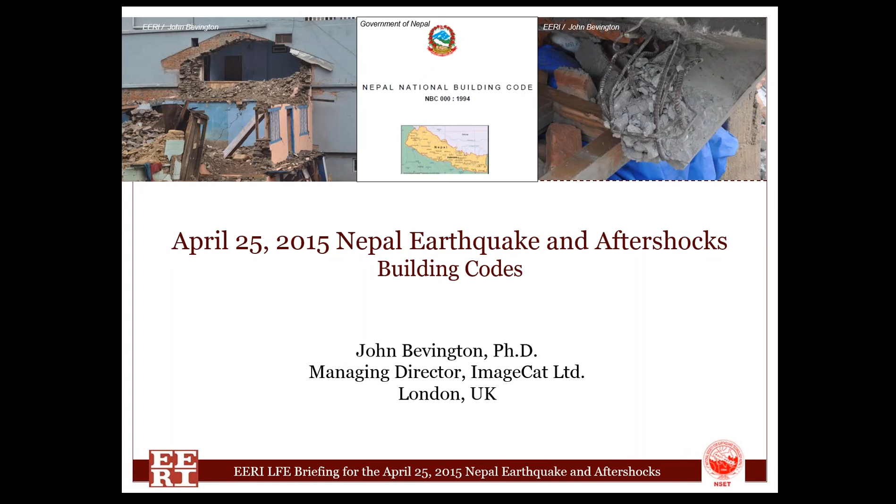Hi, I'm John Bevington, a geospatial technologist from ImageCat in the UK, and I have the pleasure of presenting an overview and discussion of building codes in Nepal. This has resulted from my participation in the EERI Learning from Earthquakes reconnaissance mission to Nepal to study the 25th of April earthquake and subsequent aftershocks.

This talk is one of a series of presentations from the Learning from Earthquakes reconnaissance team, and I recommend that you watch the other talks which cover a broad range of perspectives on the Nepal earthquake. A number of these talks are very relevant to the topic of building codes, such as building performance and resilience, and these are highlighted here in purple.

Building codes are a key issue for any seismically active area, whether a developed or developing country. They provide a set of regulations that govern the design, construction, or maintenance of structures to ensure earthquake safety for the occupants of those buildings. As the saying goes, earthquakes don't kill people, poor buildings do.

Following a relatively low amount of attention in the Hyogo framework for action, especially in the area of code adoption and compliance, the recently published Sendai framework specifically addresses building codes as a method of investing in national and local risk reduction measures. This is not only the development of codes, but also the revision of existing codes and regulatory and practical methods to encourage and enforce the implementation of codes in a culturally sensitive manner.

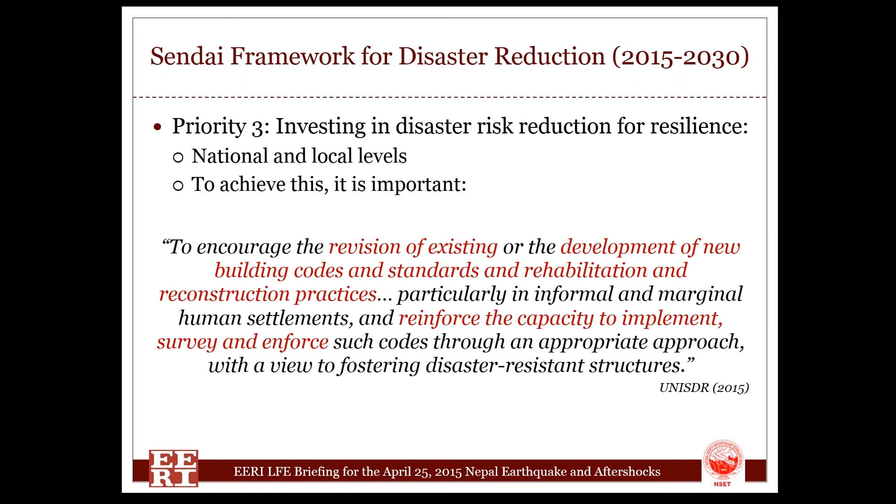An appropriate and effective building code backed up by sufficiently robust implementation is critical for such a seismically active country as Nepal. A major problem for Nepal is the number of owner-built properties. Numerous studies, including the one shown here from 2000, highlight the prevalence of owner-built as the predominant type of construction, over 80% in urban and over 90% in rural areas.

According to the Ministry of Physical Planning and Works of Nepal, only 5% of owner-built buildings have professional engineering design and supervision. Most of these structures follow the advice of local craftsmen and masons. The statistics presented here are for Kathmandu Valley, the most developed region in Nepal. This situation would only be exacerbated for more rural areas outside of the valley. Such a high proportion of owner-built properties means that great importance is placed on finding a suitable mechanism for governance, regulation, standards and enforcement.

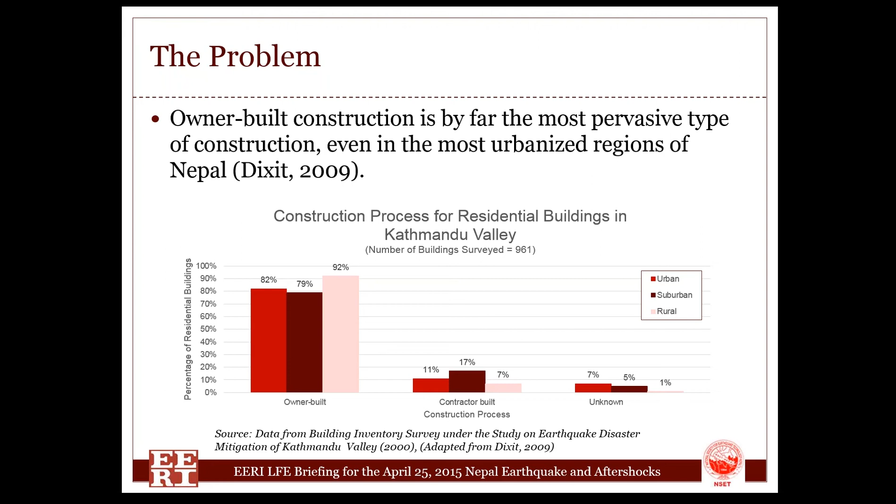A building code exists in Nepal. The Nepal National Building Code is a relatively young initiative established following the 1988 earthquake, which killed about 700 people. A consultation process in 1991 led to the commissioning of an international effort to publish the Nepal National Building Code in 1994. The code was largely based on the Indian code of the time.

It took until about 2003 for it to be approved by the government, with it being made mandatory only in 2006 for all municipalities, the largest urban developments in Nepal. However, no deadline has been set for implementation, which has caused several issues since. A review of the code took place in 2009, and a draft of the new code is now overdue, set for publication in mid-July 2015. As yet, in late July, no draft has been published, nor is it available yet to the project team.

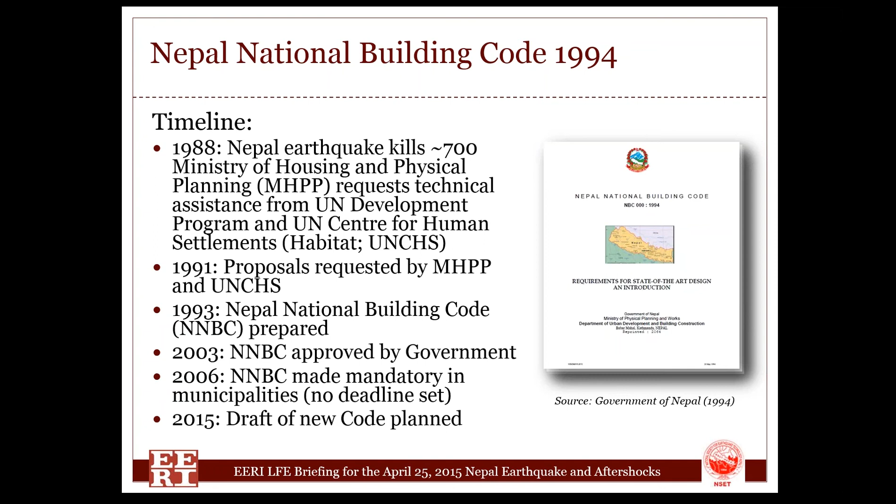Here is a summary of the Nepal Code. The code is aimed at covering the typical and most common buildings being constructed in Nepal. The hierarchy is around the sophistication of engineering input provided in the design or construction of a new building. Part 1 focuses on the international state of art. This addresses those points that should be taken into account by designers who wish to design structures for Nepal by sophisticated methods, more sophisticated than those described in Part 2. This is typically for the largest structures.

Part 2 describes professionally engineered buildings. This contains the standard code requirements that professionally qualified engineers will recognize and must meet as a minimum when designing structures in Nepal. It covers structures such as hospitals, meeting halls, factories, multi-story buildings and residential buildings.

The third part of the code is the mandatory rules of thumb, which focus on non-engineered, small buildings that have not had input from a professional advisor. The requirements are in terms of limits on spans, heights, minimum reinforcing, member sizes, etc.

And finally, Part 4 provides guidelines for remote rural construction. This addresses about a dozen typical building styles prominent in rural areas. It provides diagrams and descriptions aimed at technical advisors, house owners, and laypersons. These guidelines emphasize the changes that should be made to traditional practices to improve the seismic resistance of new buildings that are not subject to modern quantitative analysis or rational design consideration.

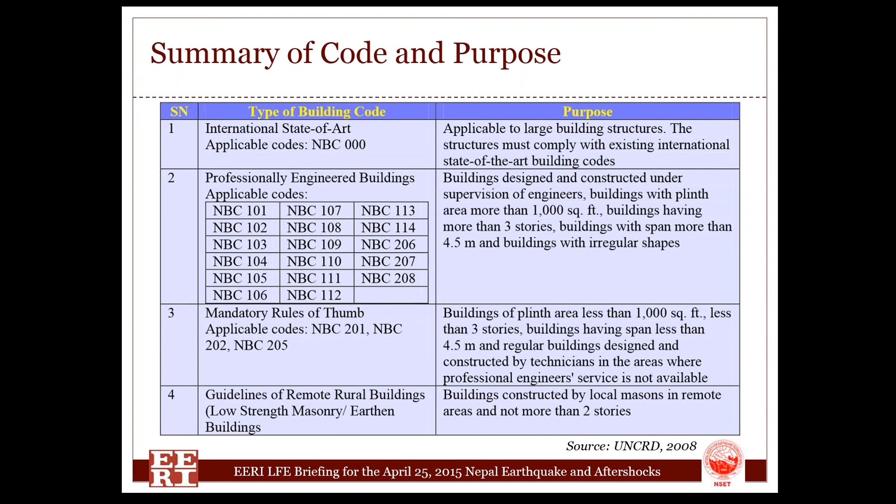Several of the most pertinent seismic design considerations are summarized here. The code provides design requirements for plain and reinforced concrete, timber and steel construction. Professionally engineered buildings are largely based on Indian standards, which have subsequently been revised.

Several elements in seismic design simply refer to the Indian code, such as detailing considerations. Force requirements, as well as technical detail on seismic coefficient method and modal response spectrum method, are included. In addition, the code permits unreinforced brick masonry augmented with rebar at the openings, corners, and horizontal bands.

The mandatory rules of thumb cover most of the predominant building types observed by the team in country, such as reinforced concrete, infill, and load-bearing brick and stone masonry. The mandatory rules of thumb provide guidance on detailing requirements and include some analytical requirements for RC infill frame, the most commonly observed structure type in Kathmandu Valley. Again, the MRTs also permit unreinforced masonry with similar augmentation as previously described.

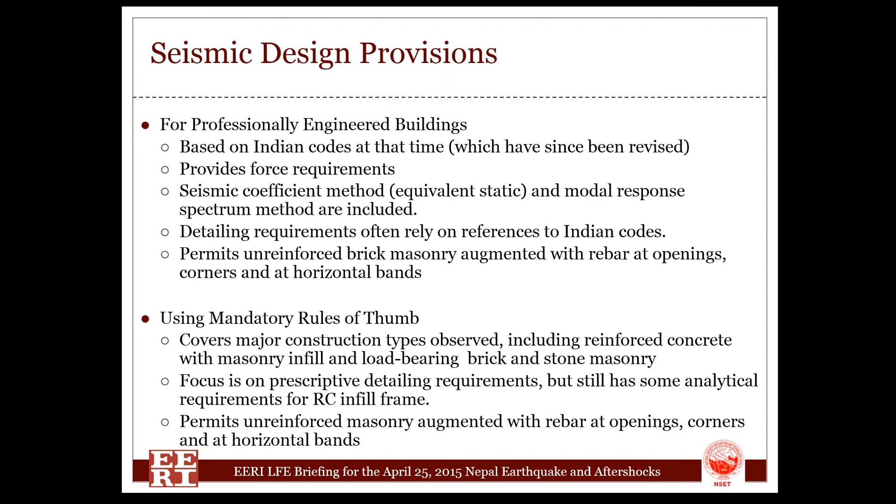We had a number of initial observations whilst on the mission. Municipalities have a mandatory responsibility for issuing permits and ensuring compliance to the code for new construction. We found a low rate of adoption. Only 26 out of the 191 municipalities have begun the process of implementation. This was backed up by the literature, which showed at the point of adoption in 2003 that only 3 municipalities voluntarily adopted the code.

Within municipalities, the picture is mixed as well. We have seen examples of public buildings adhering to codes with private buildings not. And this was apparent from the education sector, where private schools have little to no code compliance. In urban areas, some municipalities are leading the way, such as Lalitpur, and some are falling behind, especially those outside of the valley. In remote areas, there is almost no evidence that codes were being implemented widely, let alone enforced.

Since the mission, we've discovered that many of the bylaws enforcing the codes exist in municipalities, but are not applicable in the Rural Village Development Committees, the VDCs, meaning that people are using this technical loophole as a way of bypassing the code. There is a clear lack of regulatory framework to ensure code implementation. Resources are limited, particularly trained engineers, meaning monitoring and enforcement are ineffective.

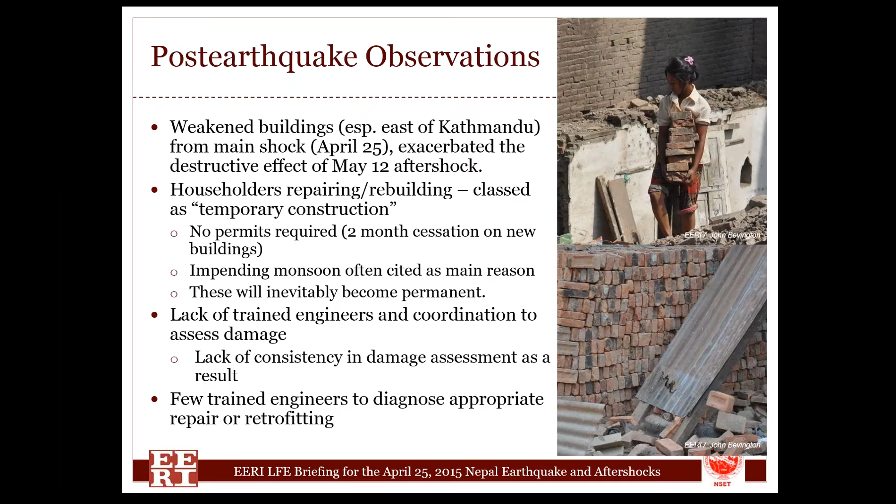I'll now go through a few examples from the mission relating to the wider code issues. Here is the Parkview Horizon complex, consisting of 213 apartments and one of the most severely damaged apartment complexes in Kathmandu. It consists of 5 buildings, each with 17 stories, and has numerous issues.

High-rise buildings were particularly badly affected by the shaking from the main shock. The most prominent issue seen here is that the permit issued for these buildings was for a design of 12 stories, not 17. All 5 towers have been red tagged and declared unsafe by government inspection.

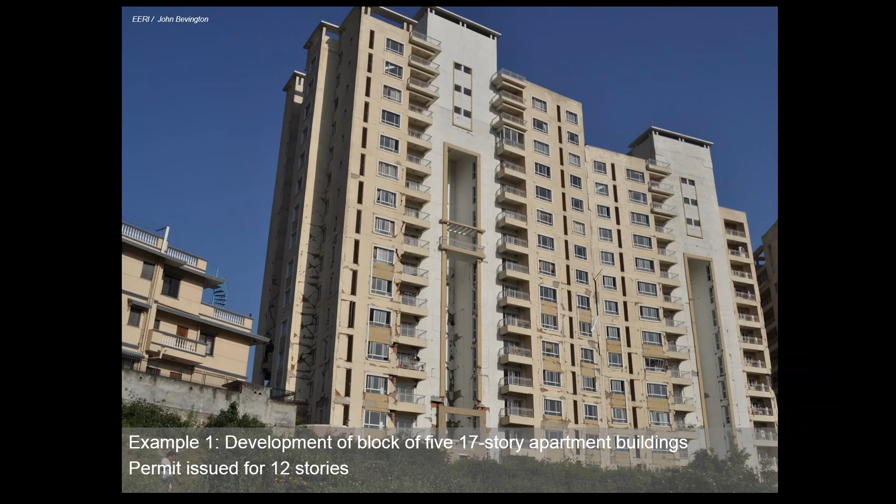These buildings are on the road to Chautara. This is an example of the use of weak rubble stone infill on the bottom base story, noted in the red oval in the picture. This type of construction was seen in numerous areas, including on precipitous slopes such as seen here.

The cause of failure of the collapsed building on the left is not known, but issues such as infill or lack of geotechnical input may have contributed to the failure of this building.

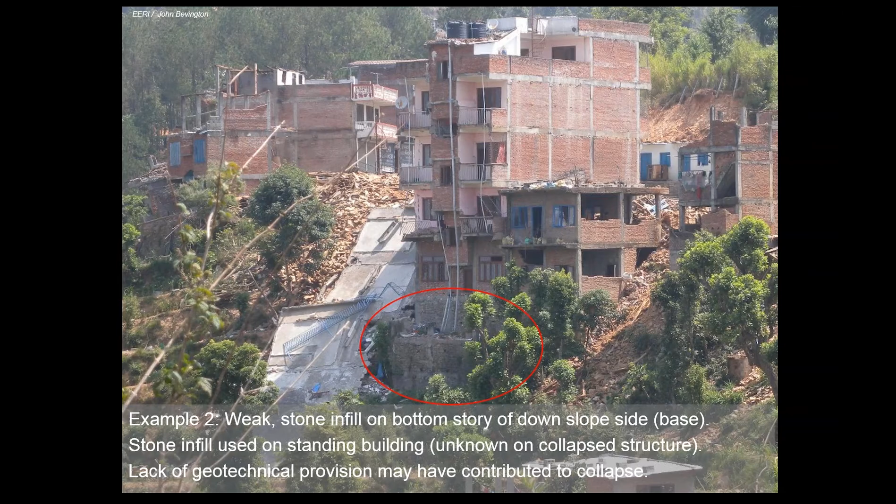The third example is from a school in Sankhu. This shows inappropriate detailing of concrete reinforcement. The top left image shows the front facade of the school. Several columns are like the one in the oval. There's a blow up of it on the left and a blown up further on the right.

It shows a 90-degree hook in the red circle, wide tie spacing, well over D/2 and even approaching D, and no cross tie on the middle vertical longitudinal bar, which is shown here in the yellow circle. This standard of tie spacing was seen in other locations and is essentially of very limited to no value at all.

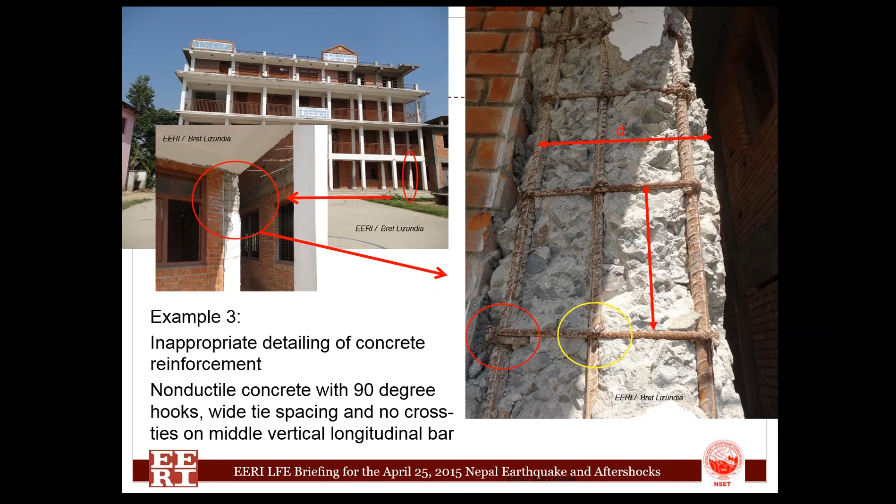The final example is from a rural area to the east of Kathmandu. Here we met with a very inspirational lady, a homeowner whose 5-story house suffered collapse of the upper 3 stories. The permit for the house was originally for a 2-story building.

She told us that she had used her own savings to demolish the unpermitted upper stories and that her aim was for the next 5 generations to remember not to build on top of the house in the way it had been previously.

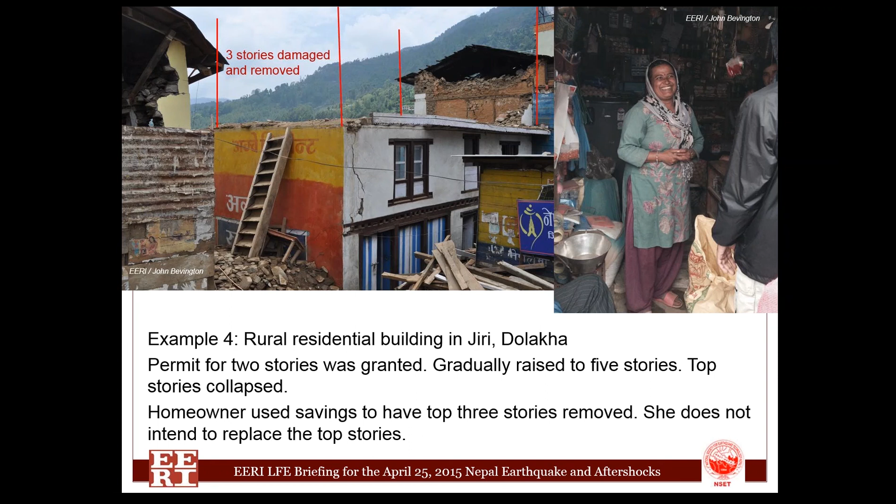In terms of the adequacy of the code, a number of general observations were made. For new buildings, a risk-targeted approach to design by incorporating ground motion in the design process would provide a better level of seismic safety. Provision of guidelines for dealing with geotechnical issues such as site amplification, liquefaction and ridgetop amplification are all warranted. And there is no current provision for disabled access.

A large issue for existing buildings are the lack of standards or guidance for retrofitting existing structures. After the earthquakes, it's clear that there is a lack of guidance on repair or retrofitting, as well as no guidance on safe demolition of damaged buildings. Revisions to the code are overdue, but the content of these has not yet been revealed.

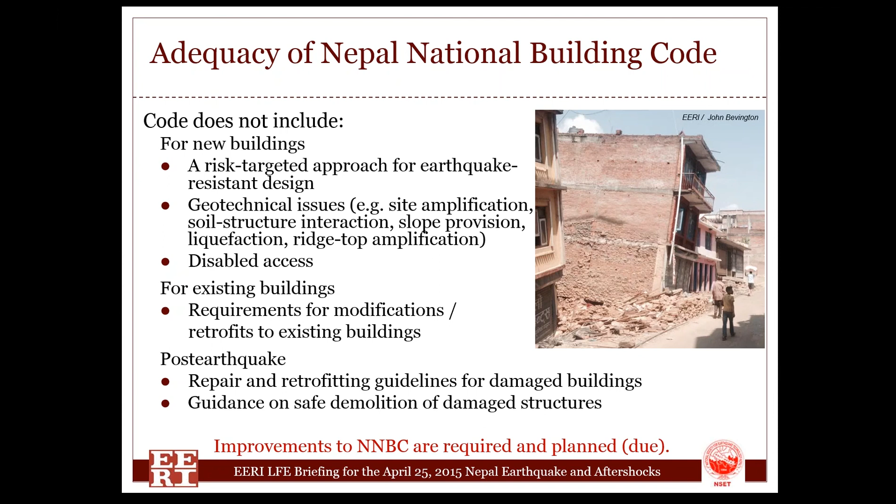Some technical issues have also been identified. For seismic design, adequate description of irregularity will give a clearer picture of the effect of soft story. Provision of more detail on the effect of infill masonry should be a priority area of improvement, particularly the specifics of strut infill and the dynamics of the impact of a strut on concrete frame.

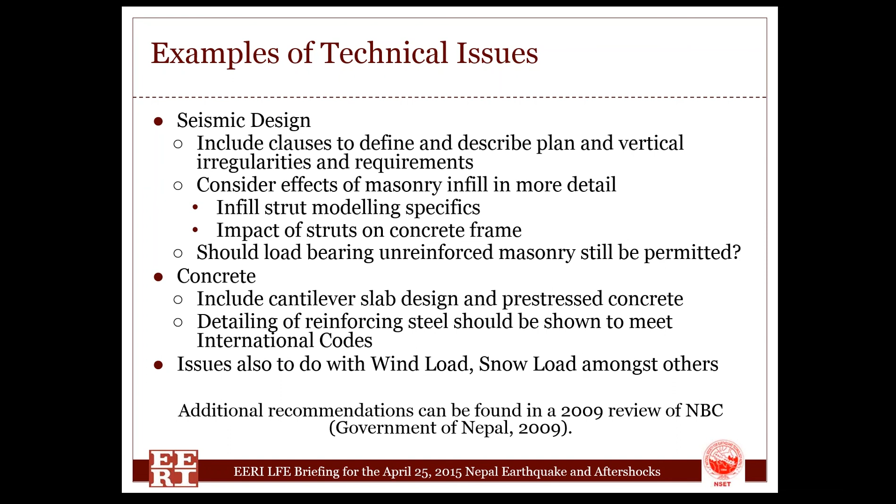Additional information on concrete design, such as cantilevered slab or pre-stressed concrete, should also be added. International codes would provide a useful reference to benchmark the detailing of steel reinforcement. There are a number of additional recommendations which can be found in a 2009 review of the Nepal Building Code. This was published by the Government of Nepal. You can find this in the reference section.

Housner and Jennings back in 1982 reminded us that it's not economical to design every structure to resist the strongest earthquake without damage, but there are clear areas of improvement for the National Building Code of Nepal. Occupancy should be taken into account for occupancy load, for change in occupancy, and performance-based design for specific occupancies, such as hospitals, schools, etc.

Usability should be at the center of the code. It should be a target to have safe and usable critical facilities after an event, including generators and utilities. Housing should offer shelter in place, perhaps even yielding on utility provision. A key point not addressed is the appropriate planning of urban centres, which we saw little evidence of in Nepal. These plans should afford safe access and egress and provide usable public spaces for temporary refuge, aid distribution, or even debris removal.

Critically, the building bylaws are, by legislation, applicable in the areas of jurisdiction of the municipalities, yet they do not include provisions for the Nepal Building Code. Most of the rural areas are not covered by the Building Act and the building bylaws. Municipalities such as Lalitpur have voluntarily initiated the application of the NBC back in 2003. So therefore, expansion of the building bylaws should be legislated to close off these loopholes for rural construction. The end goal for all of this is to increase the overall resilience in Nepal.

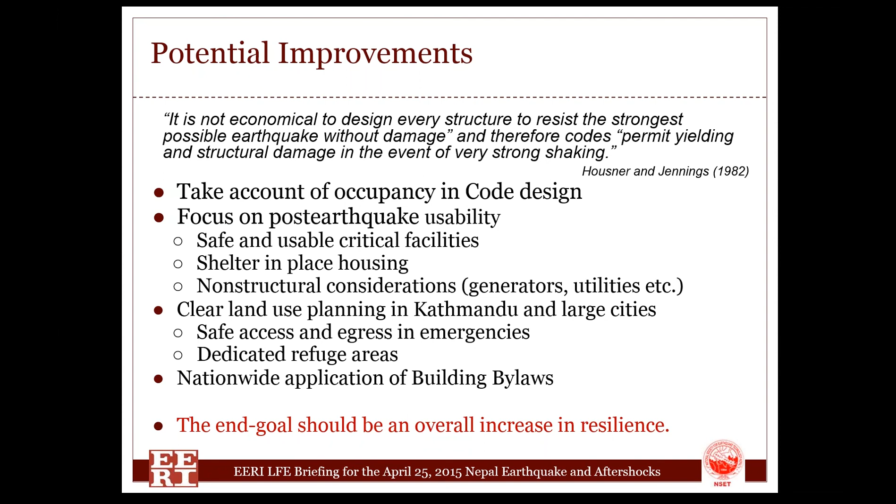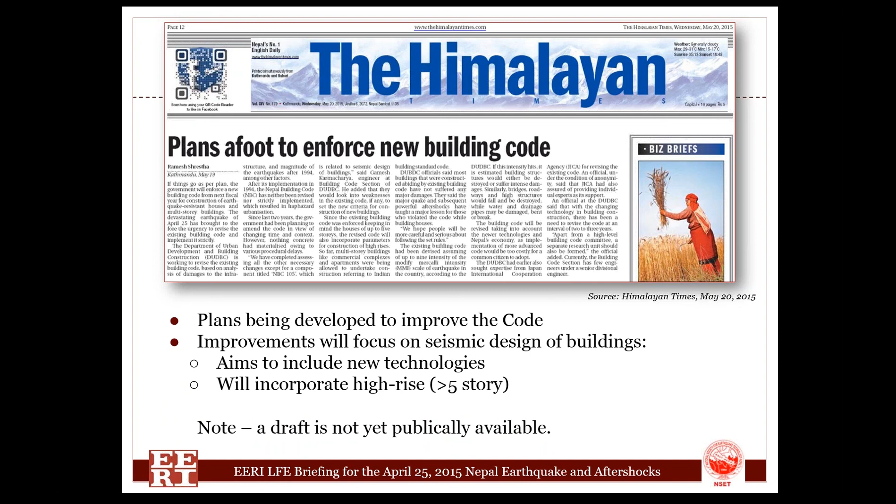The earthquake has focused the minds of the government and the public to the issue of building codes. There have been several community-focused activities to promote the implementation of the codes, and the enhanced awareness has promoted this issue to the public consciousness. But my question is, for how long before the human memory fades? There is a role for the engineering community to develop basic guidelines, do's and don'ts, to aid the repair and the retrofitting processes. Workshops to develop local capacity have been very well received to date.

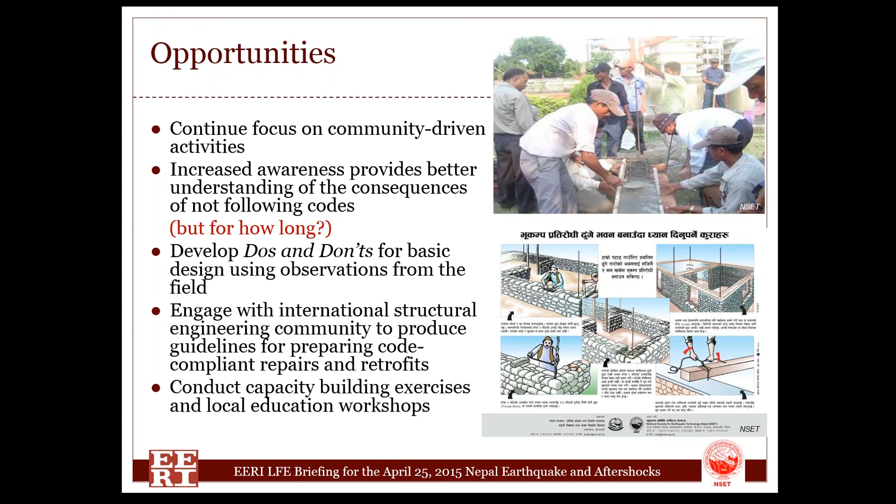The programs led by NSET, the National Society of Earthquake Technology, should be given due acknowledgement as positives in Nepal. Several of these are ongoing and involve international cooperation. The NSET project with USAID and the Office of Foreign Disaster Assistance, the Building Code Implementation Project, targets 24 municipalities to develop local mechanisms to further advocate code adoption and compliance. And these focus on earthquake awareness, local training, and capacity building workshops.

It's clear that there are very strong relationships between NSET and their implementing partners in the municipalities. In Dolakha, for example, after the earthquakes, the municipality donated land to develop a Reconstruction Technology Centre, where local masons and engineers can receive training in appropriate repair and reconstruction practices. All of these activities build on the ongoing public awareness efforts of NSET, including the regular mobile clinics and the annual Earthquake Safety Day.

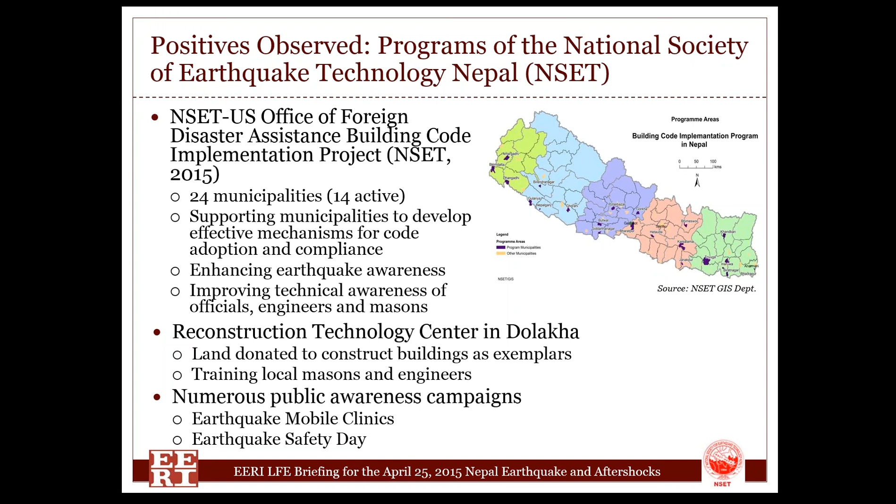The ambition to challenge and improve the technical detail of the building code is welcomed, and it's mainly driven out of the Department of Urban Development and Building Construction, part of the government. It is hoped that the new draft code will be published soon and be available to review. Other positives should be noted, such as the school retrofit program outlined in the Building Performance 2 presentation by Bret Lizundia as part of this series. At the forefront of the code issues in Nepal, Lalitpur municipality has been working on a UNDP-backed program to automate the building permit process.

Additionally, from anecdotes, we heard of the desire to remove additional stories in several municipalities, as well as locals complaining of the standard of their neighbours' repair, signs indeed of heightened awareness of the issue of poor construction due to the earthquakes.

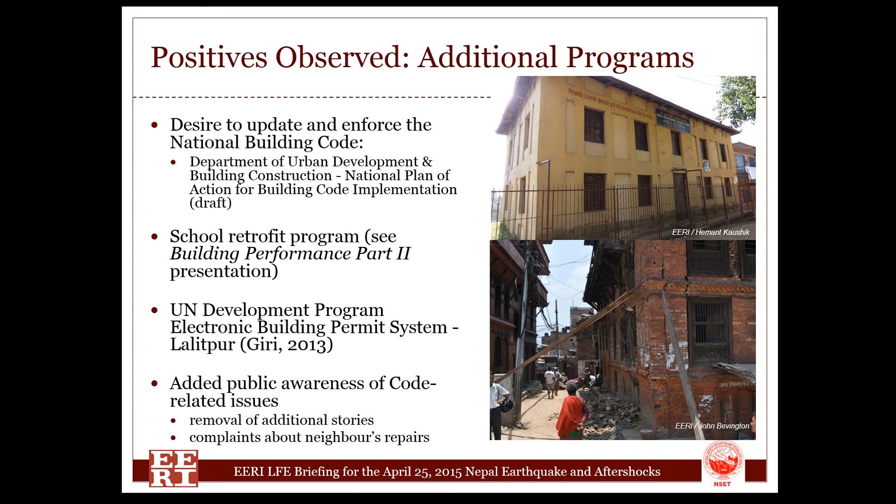The LFE mission to Nepal feeds into the ongoing group project of the EERI Housner Fellows Programme, in which I participate. The Housner Fellows will continue to focus on the issue of building codes through their group project, Strengthening Building Code Compliance in Developing Countries, a case study of Nepal. This project has focused on the low and mid-rise residential structures in 3 municipalities inside and outside Kathmandu. The project largely concentrates on issues of code implementation, compliance and enforcement, rather than a pure technical analysis of the strengths and weaknesses of the code. So we aim to have additional data collection effort in fall 2015 and plan also to elicit input from the wider EERI community in a forthcoming survey.